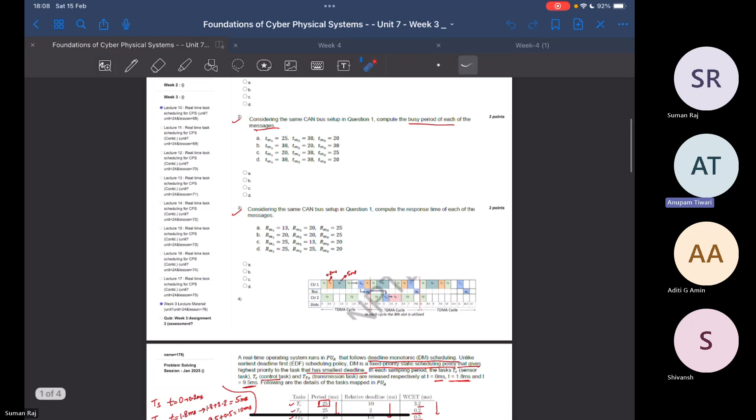Now, this semester, there is a problem in question number 8, and question number 7 is also having doubt. You can see ma'am, though you don't solve it, this present week is the last week.

So they say, number 8 is like find out the settling time in seconds, so you just have to put the number, but the unit is not required then? No, unit is not required, you just put the number, that's it.

Question number 7, again there is doubt. What is the doubt? Now if you see, frequency is under root of k by m, that is the formula. Which question are you talking about? Seventh question.

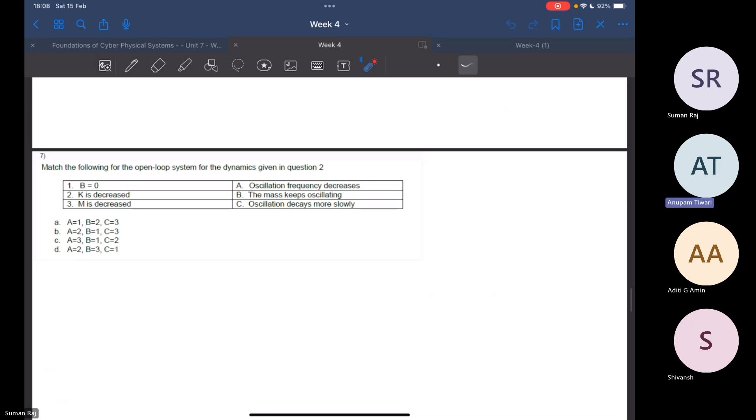Seventh is this one, right? Now, if you see the formula for the frequency, which is under root k by m.

K and m both are reciprocal. Now, if one thing decreases, the other will increase. Both of the answers are showing decrease.

K is okay, we'll come to these questions. We haven't yet started discussing, right? We'll come back to these. Decreasing is also having a problem in this.

So any question? Wait, how many are there? We are three people, so I think we can start.

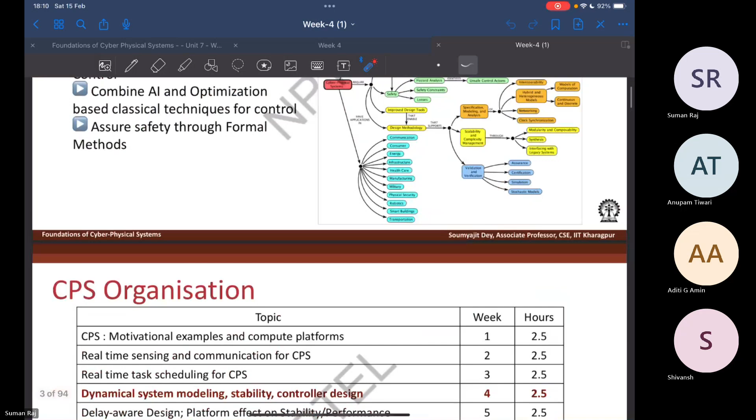So coming back to this, so in this week, where is that? Yeah, so there, it is written that dynamical system modeling, stability, and controller design.

So this is basically split into two parts in general. One is this continuous time modeling and control of dynamical system, and the other one is basically, I think, on the stability part. So before I move on to this, how many of you have already watched the lectures?

So that I know if I have to go deep into some of the things or just skim through. Can you raise your hands? I've watched the first 3 or 4 lectures, and then I started going through the slides before going to the lecture because I wanted to get an idea before I go to the lecture. So I've not watched all the lectures, but I did start watching them. 3 or 4 I've watched.

Okay, great. What about Anupam and Aditi? Have you watched the lectures? I have watched all the lectures. Okay, watched the slides. Okay, great. Aditi, anything from your end? Okay, so I think what we can do is since you have watched all the lectures and Shivansh has watched the initial few lectures.

The initial parts I'll skim through, but then in the later part I'll just highlight some of the details. Okay, so here, as is also pointed out in the lectures, we have this cyber physical system, and in this particular lecture, we were focusing on the controller and the control input computation, right?

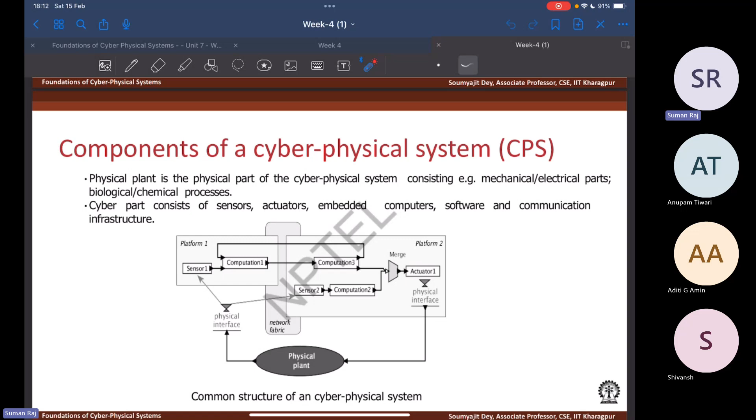So over here, like there are these different components altogether, but then let's say cruise control system, okay? So over here, they say that it controls the speed by measuring the vehicle speed and you compare it to a desired or a reference speed and automatically adjust the throttle.

So in general, whenever you want to go ahead with any control system or you want to do anything, you need to write their state space equations. Okay, so you need to identify the variables, and then somehow you need to identify the equations that are kind of governing that particular system.

Okay, so in this case, this is a very, very simple example. Here, if the mass of the car is m, and then u is the force that is generated at the road or the tire surface, and then this bv is actually the drag force.

Okay, so the equation goes like this. You have this m v dot, and v dot is actually your a, that is acceleration. So mass into acceleration is actually force, and then you have this drag force. So summing up both of these is actually equal to the force that is generated at the road interface.

Okay, and then we say that y is equal to v. So we are kind of having these equations properly. So here we say that v is equal to x dot, and what is x that they have chosen?

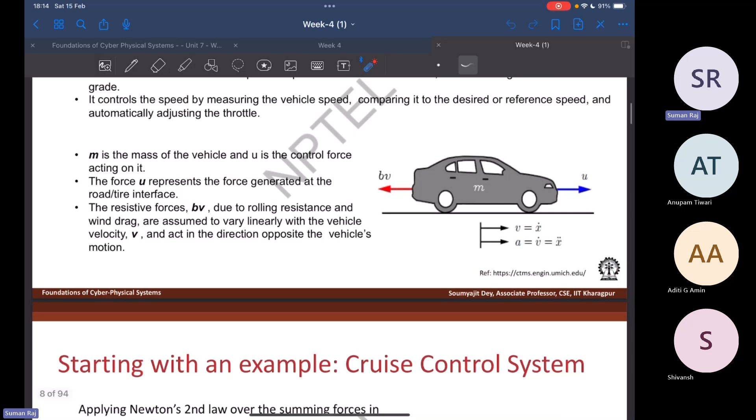Okay, x is in general displacement, and x dot is like velocity. And then you have acceleration, which is v dot, which is actually dv by dt, right? And this is actually dx by dt. So this is kind of shown in this way in the control systems part. So acceleration is your x double dot. This also you can write as d square x by dt square. Okay, so this is how things go on.

What is y there? Where? The last equation over here. Yeah, they are just saying probably that you're assigning v as some variable y. So over here, if you write, it will be like m y dot plus b y is equal to u. On u also, I think they might say like u can be x or something like that. Okay. Yeah.

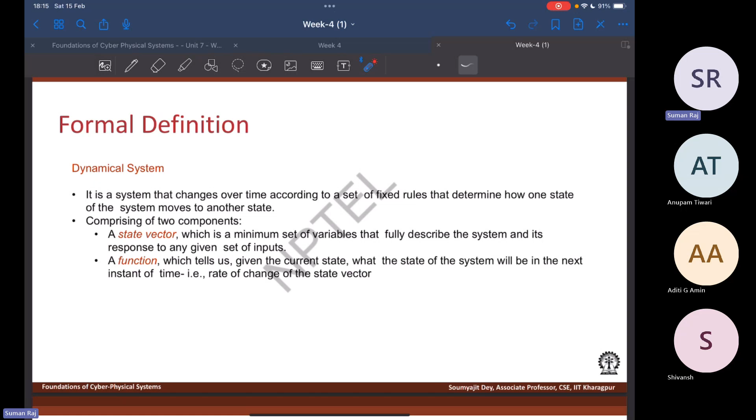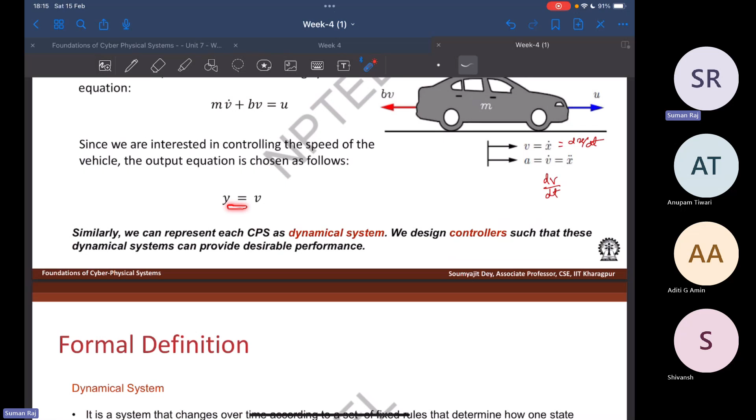All right. Now in this dynamical system, we have two specific things. One is this state vector and the other is a function. So state vector is like these variables that you need to describe your system. So over here, when we were talking about the state vector, you will have your v and a. These are different things, but then eventually you just have your x, and if you want to represent it in terms of y, that you will do. So we'll look through some examples later.

And then there is a function that is actually transforming your current state to some future state depending on some control parameters or the input that you get. So here, let's say this is a state vector x(t), and x is parameterized by t. For any state determined system, you know the state variables at an initial time. This is important. You know the system inputs for time t greater than 0. You know the initial state, and those two will be enough for you to predict the future state or output.

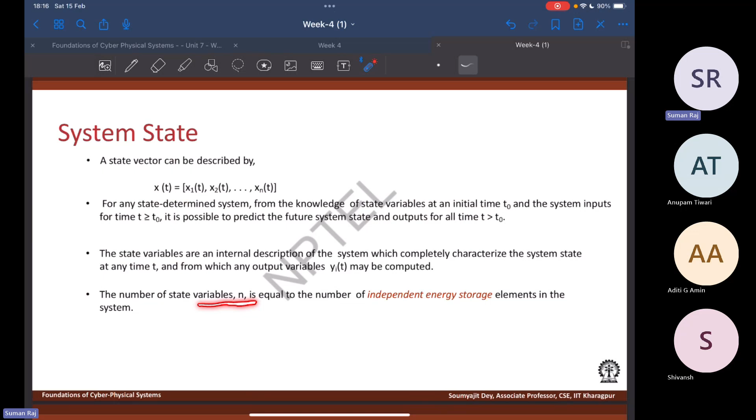Then we have the state variables. They characterize the system state at any time t, and the number of state variables n should be equal to the number of independent energy storage elements. So in general, the state variables that you pick out from your system should all be independent of each other, and in no form should something be the derivative of something else, like x2(t) being the derivative of this. That shouldn't happen.

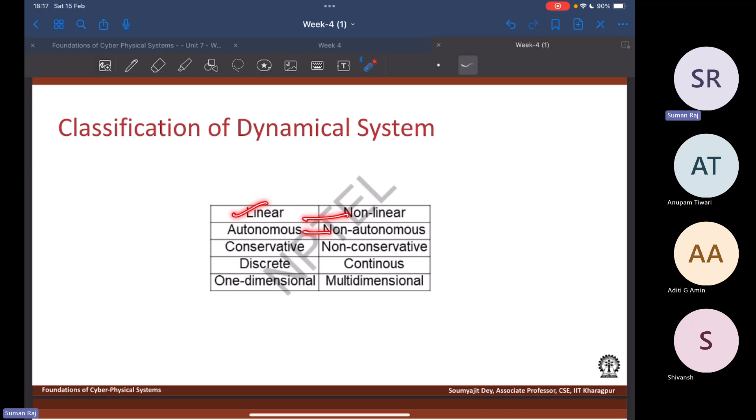Okay, so now let's say we have this kind of a function, and there can be multiple functions, and then you have these different state variables, and x1 dot is represented by a function of all of these entities. So there are different kinds of dynamical system: linear, non-linear, autonomous, non-autonomous, conservative, non-conservative, discrete, continuous, and 1D

or multidimensional. By linear system, we mean that the state equations should satisfy two basic properties: additivity and homogeneity. If your equations satisfy these two, it is a linear system. If not, it is a non-linear system. So f(x plus y) is equal to f(x) plus f(y), with f(x) equal to 3x as an example. That is a linear equation. But if you have a parabolic, that is not linear, or even something like xy is not linear.

The other classification is autonomous and non-autonomous. If there is a shift in your input and it reflects in your output also, your system is autonomous, otherwise it is not. So take this example, y(t) is equal to 10 x(t). Now a delay is introduced, x of t plus delta. So your y(t) is going to be 10 times x of t plus delta, right?

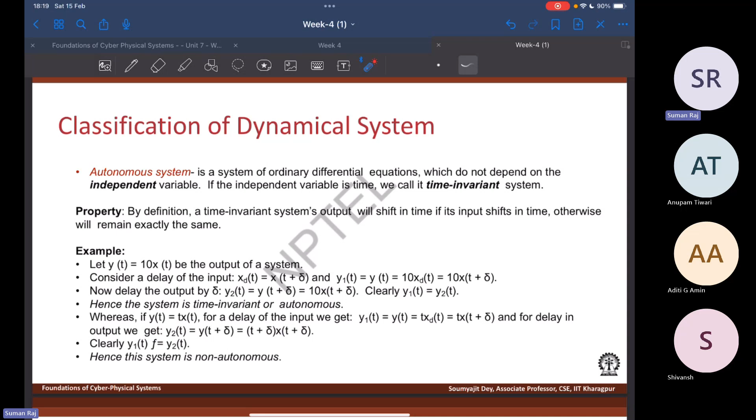Now see this other example. Where is it? Yeah, y(t) is equal to t times x(t). If you introduce the delta again, it will be t plus delta times x of t plus delta, right? So this is not reflecting the changes in the output in a similar way as x was changed. So this becomes non-autonomous and this becomes autonomous. And in the autonomous case, if your independent variable is time, it is called a time invariant system.

All right. The other one is very generic: conservative and non-conservative. In the conservative case, your energy remains constant. And here, there is some kind of dissipation happening. Now you have discrete and continuous, should be there somewhere.

Okay. We'll come to it whenever it is there.

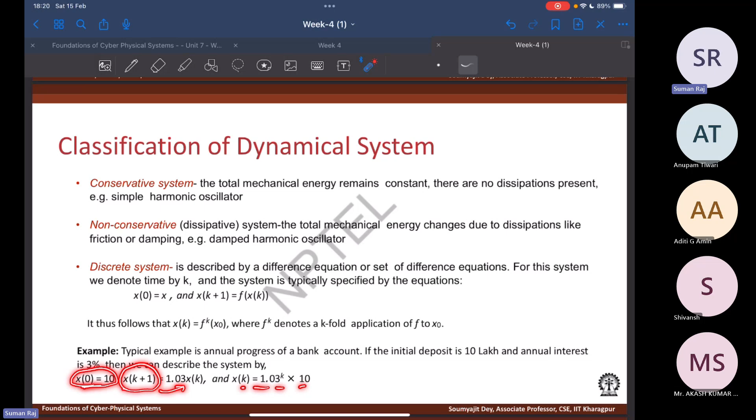So this is described by a difference equation or a set of difference equations. All right. So let's say over here we say that x of 0 is equal to x and x of k plus 1 is equal to a function of something. Okay, so over here this k represents the time. So at every time step, this is what is happening to the value of x. So you can consider those as the different time steps. So this is like the initial value, and then at the next time step, you get this value, and then after that, you get this kind of a generic thing.

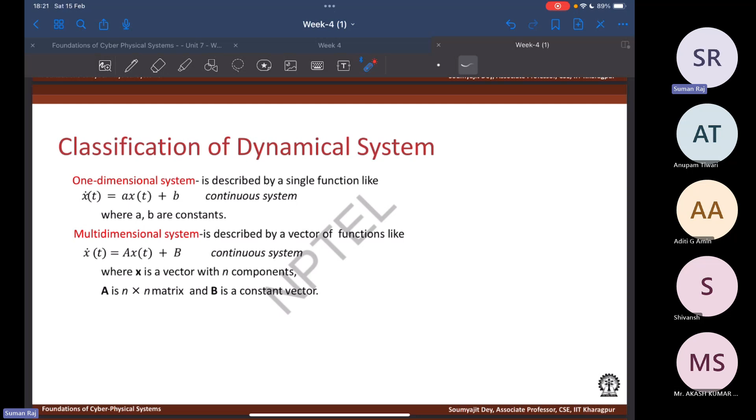Again, one dimensional and multidimensional. So over here, if you represent some kind of an equation where your a and b are just constants, it is called a 1D equation. And then if it is multidimensional, it means that your a is actually a matrix and your b is a vector.

Okay, so these are fine. I guess we can skip this. Yeah, feedback system will be there. Like if you have output of one going to the other and input of one going to the other, something like that, you have this feedback loop.

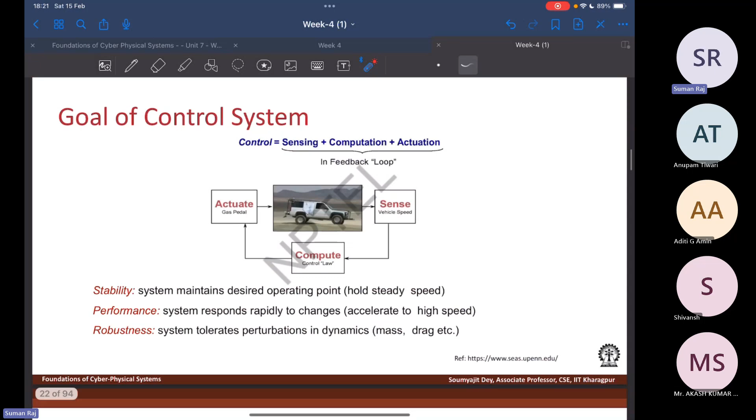And yeah, so this is one important thing. Whenever we want to do some kind of a control, we have sensing, computation, and actuation. So the major goals of these control systems are these three. The system should be stable and the system should have a good performance. By good performance, we mean that it should respond rapidly to any changes. And the system should be robust, which means that if there are any changes in your external environment or any kind of perturbation, then your system should be tolerant to those things.

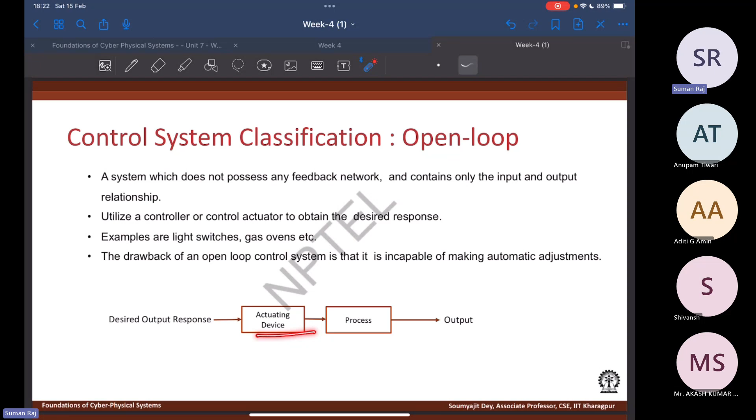Okay. Yeah, so then another kind of classification, this is where your feedback comes into the picture, and then we have our transfer function. So if there is some kind of response that is given and then something is actuating and then you have the process, this is an open loop. And if you have some kind of a feedback going back to your controller, that is called a feedback. And that is actually a closed loop cycle.

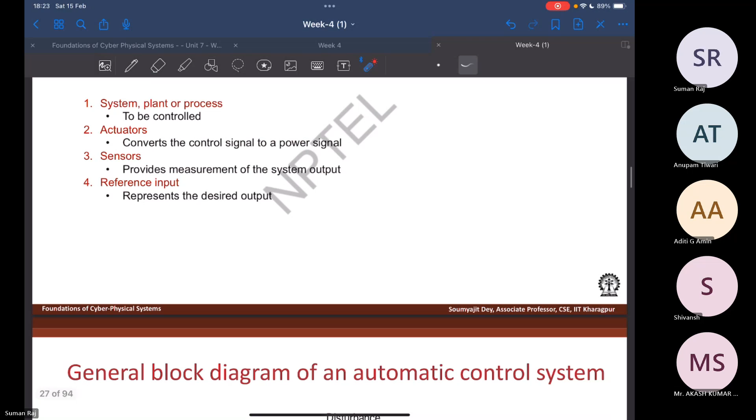Yeah, I think this is a good diagram. So for this closed loop, let's say you have set some set point or reference input, like you want to maintain 50 degrees Celsius somewhere. And then there is a controller which tries to maintain whatever air conditioner or heater is there at 50 degrees Celsius. And then you have the actuator that is actually doing the actual work. And then let's say some kind of noise is there. So this disturbance is actually acting as noise. Then you have your process.

So whatever is your actual output goes back as feedback, saying that, let's say, over here you said 50 but we are getting only 40 degrees. So for the error that is produced, which is just 10 degrees Celsius, the controller will make changes according to that. If initially this was 0 degrees Celsius, the error is going to be 50, so the controller has to make changes faster to reach the set point. So these things happen at the controller level, and this error plays a major role, and to get the error we need the feedback.

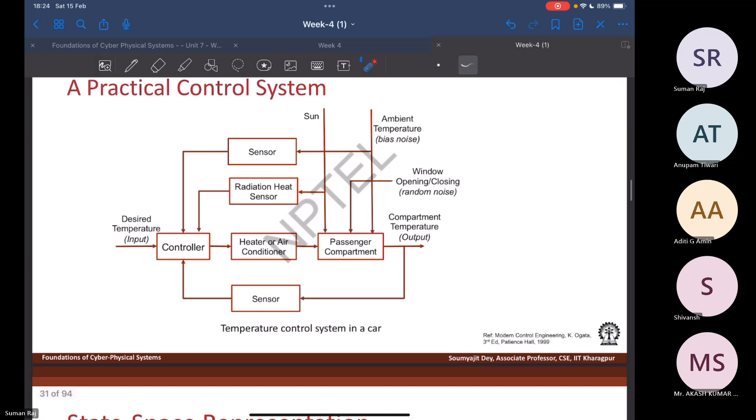Yeah, I'm actually trying to get some example of the state space. But yeah, okay, we can start.

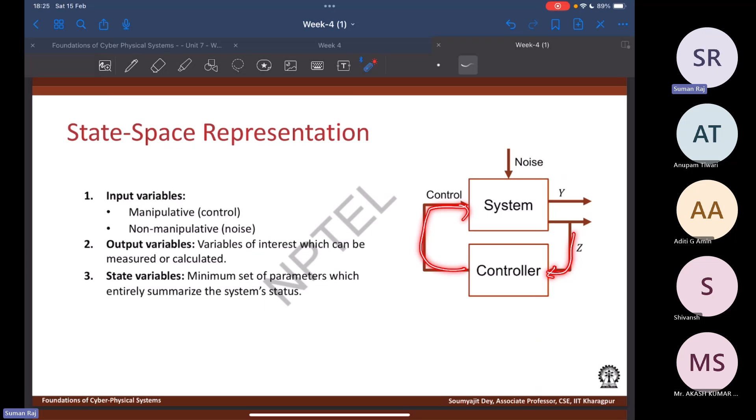So about the state space representation, you have this system, you have a controller, and whatever output you have from the system, that is actually your states. And some of the states you can send back to the controller, which goes back to the system. And then we have some kind of noise. So over here, the state is the smallest number of variables such that the knowledge of these variables, together with the knowledge of the input, completely determines the behavior of your system.

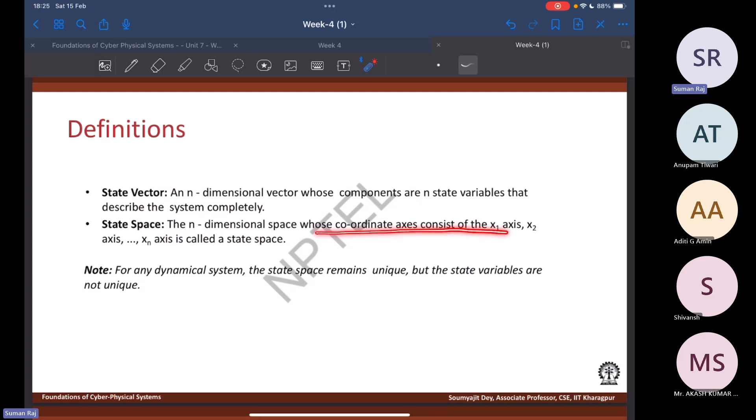Okay, so you can have it as a state vector. So state vector is actually this n-dimensional vector whose components are n state variables that describe the system completely. Those were that x, y, and so on, right? And then you have the state space. So this is actually the n-dimensional space whose coordinate axis consists of the x1 axis, x2 axis, and all of that. So I think these will be cleared when we go through some examples. Let's see. Yeah, let's look at this for now.

So there are these two different kinds of state space models. One is continuous time, one is discrete time, right? So let's say over here we have this continuous time. So this we have also seen earlier. So we just represent it like this. Okay. So your A of T is actually your matrix, right? This was your matrix because this is multidimensional over here. And your B is actually a vector. Either it can be a vector or a matrix, depends on how is your U(t). But U(t) in general is like a single dimensional. I mean, it's a vector, so you need to have a vector over here. Okay, so these two are actually your independent variables.

And if you have some kind of a discrete time state space, you have similar kind of equations. But then if you see, this T has actually changed to K. And this is what we also saw earlier.

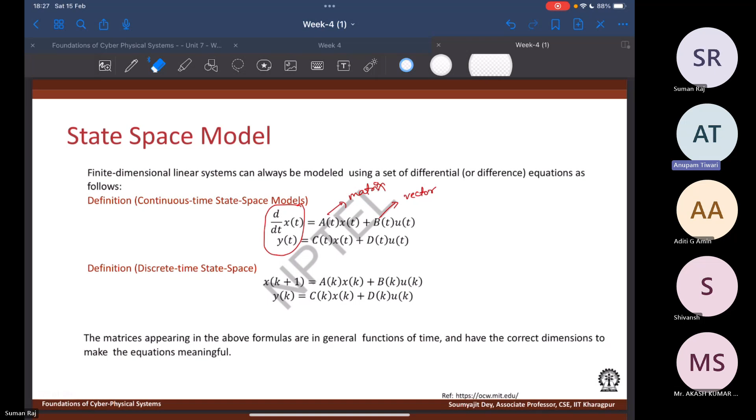Yes, Anupam, you have a question? Ma'am, can you give us an example wherein a second order equation we can represent in this form? Yes, actually, there is an example. I'm just trying to search for that. Also, what would be an example for a discrete time state space system? Because I don't get a practical example, because time will always be continuous. Yeah, correct. But actually, many questions are also based on that, on the discrete time.

Ma'am, can I say? Yes, time is always continuous, but if you use continuous equations, a lot of memory is consumed. So we make a controller in discrete time, with a sampling time, so that the memory and processing is fast. So that is the reason all continuous systems are converted into discrete systems.

Yeah, but he is asking for an example. Like, where do we practically use it? Any example, like temperature going from 50 to 60. It will become 50, 51, 52, 53 like that. So we can have a step of five, or a step of two, I think. It's more about the representation, Shivansh. Yeah, I don't get it. Yeah.

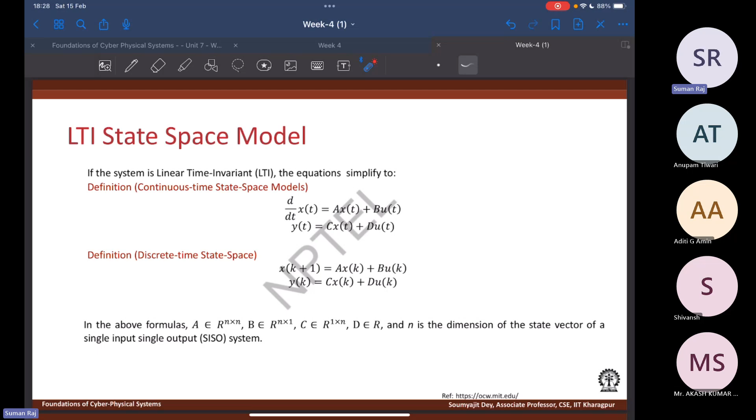Yes, let me see if there is an example, but for timing, I'll continue this. And very likely the examples are right there. I think a spring damper system is there, maybe, but we'll check. We had questions in the assignment as well for the spring damper system, like 3 or 4 of them. Yeah, I think the first 5 questions are based on that. Yeah, so we'll get to that anyways. Okay.

So about this time response analysis, let's see. Again, over here also we have some questions in the assignment. So this actually means that you want to analyze the behavior of your system with respect to time. So you have inputs that are functions of time, you have outputs that are also functions of time, and then you want to see the behavior of your system. So there are these two different kinds of responses. One is transient and the other is steady state.

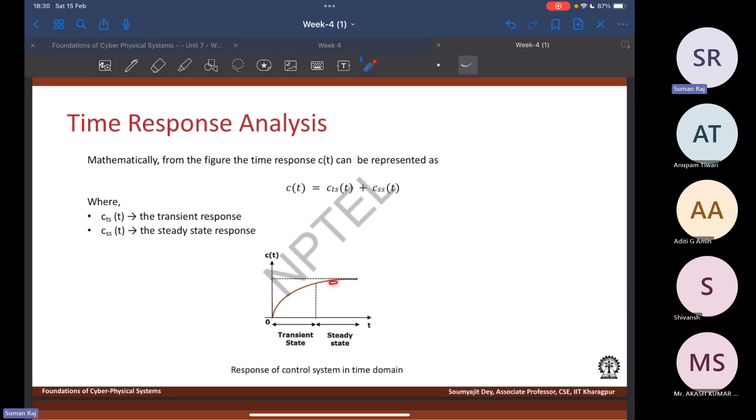So your final part just remains as 1. So your transient term is this, that becomes 0 as t approaches infinity. So your steady state value is going to be 1. All right. So those are the things.

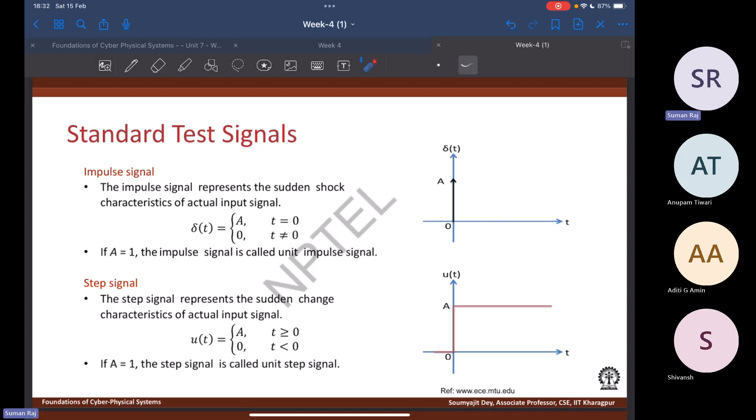And then I guess these are like standard test signals. And I think after this, they talk about the Laplace transforms. So there are a few of these signals that are important and you should just know them in general. And whenever you practice more, you would just kind of remember the equations also. Okay, so this is very simple. It's an impulse signal. Then we have this step that whenever t is greater than or equal to 0, it becomes some specific value. And if it is less than 0, it is 0.

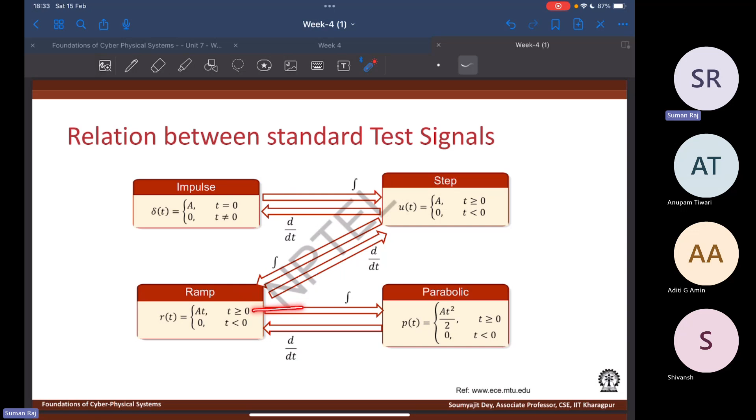Okay, and then we have the ramp signal. Then we have the parabolic. And there are certain relations between these standard test signals, which means that if you integrate impulse, it becomes step. If you differentiate that, it becomes impulse. That is straightforward. But if you integrate step, it becomes ramp, and the ramp, when you integrate, it becomes parabolic. Okay, so these are the things.

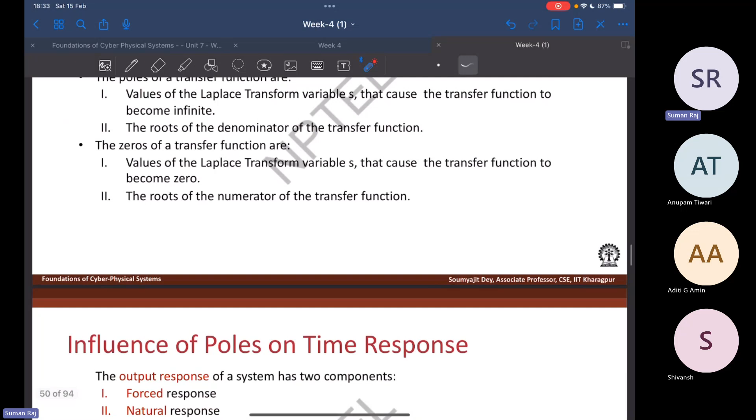No, I guess none from my side. Okay. Yeah. So what I'll do is I'll cover transfer function, then I'll skip the rest of the parts because I want to go back to the questions and assignment questions, and then take one theory at a time depending on what is required. Okay? Yep. Okay.

Before that, you need to check that it is a time invariant system. Okay. And then you calculate this transfer function as the ratio of Laplace transform of the output to the Laplace transform of the input. So over here you will say Laplace of C(s) over Laplace of R(s). This is actually going to be your transfer function. I don't know how that is represented.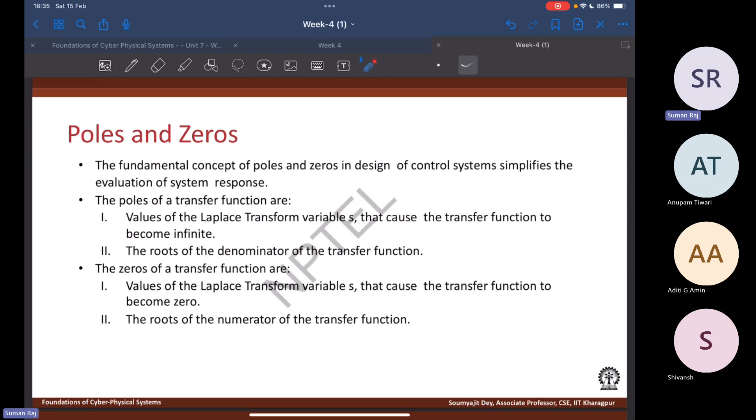Okay. And then we have these notions of poles and zeros because depending on this, your system stability is defined. So the poles of a transfer function are the values of the Laplace transform variable s that cause the transfer function to become infinite. And these are actually the roots of the denominator of your transfer function. So whenever you are asked to calculate the poles, they would actually ask you to calculate the poles of a system, not a transfer function in general. So you have to calculate the transfer function first, check the denominator, and then get the roots of the denominator.

And then about the zeros, these are the values of the variable which cause your transfer function to become 0. So obviously you have to make the numerator 0. So these are the two things. If you want to calculate the zeros, you have to make the numerator 0 because your transfer function should become 0 for those values of s.

And if you want to calculate the poles, you have to make the denominator 0 and calculate the roots, because those are the values of s for which your denominator becomes 0 and your transfer function becomes infinite. So is this part clear? Yes. Okay.

Okay, so this is fine. Yeah.

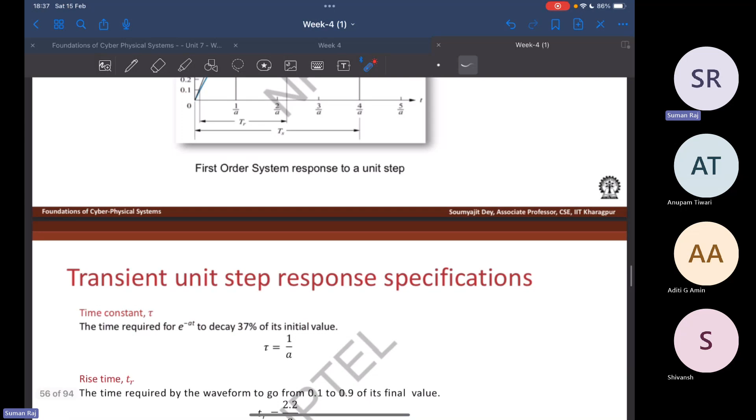Okay, so I guess with these equations, let's start with some of the examples. Oh, I'm sorry, I didn't say what a is over here. So this is actually your initial slope, which is 1 by time constant, and that's how you get this 1 by a over here. Okay, so let's see.

So the first question is about a buck converter, which is a step-down DC to DC converter that consists mainly of an inductor and two switches. In general, they are explaining how this DC to DC converter works. It switches the connection of the inductor to the source voltage to accumulate energy in the inductor. So there should actually be a switch over here. And whenever you want to charge your inductor, it connects to the voltage, like a power source.

And whenever it wants to discharge the inductor's energy, the switch opens up. So you are no longer connected to the power source. That is the basic idea over here. So it says that clearly the control input to the system is your source voltage, which is your V in. And the system's output is the voltage across the load. So this is your Vc and this is your V in.

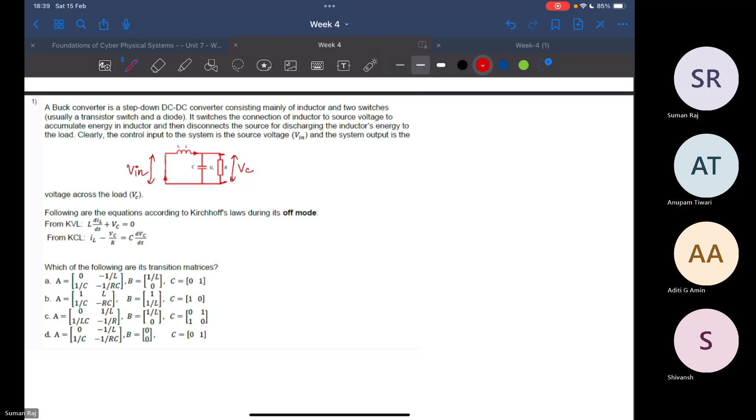All right. So they have also given these equations according to Kirchhoff's law during its off mode. The only change during the on mode would be that this won't be zero. During the on mode, the equation from KVL will actually be L di by dt plus Vc is equal to U. That will be some kind of a value. And so now the question says that you calculate the transition matrices for the off mode.

Before that, I'll actually share a paper that has done this full derivation. I won't be doing the full derivation right now, but this paper will help you. Let me see. So I've shared a paper in the chat window. Are you able to access that? Yes. Okay.

So it actually starts at section 2.a. Over there is this buck converter state space model. And they have spoken about both cases. If you look at equations 3 and 4, they are for the on case, and the other one is for the off case. So that is the thing over here.

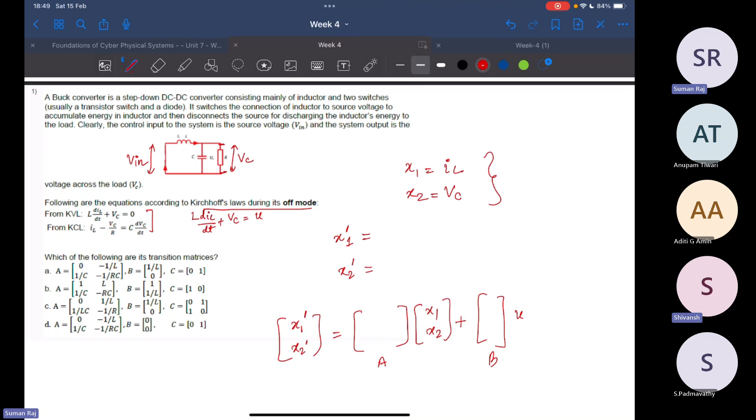What is the role that C is playing here? I get the role of A and B, but what is C here? C is from the KCL equation, which was given initially in the question itself. I don't think so — that's what I was thinking C is as well, like the capacitance. So what is C in the final answer, the options? It may be like this, just a constant.

So this C is different from that C. Yeah, so I think it should be this, plus C. But I guess we should be able to conclude the answer only from A itself because the options are all different. One of them is — okay, yeah, you can check. I'll check. Okay, yeah.

Okay, so let's move on to question 2. This is where this spring mass system with damper is there. So let's see.

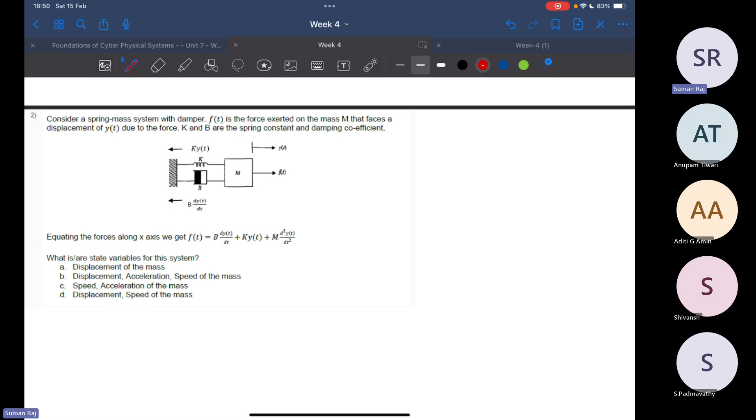Again, the very first thing for every equation is to check what are the exact variables. This question is asking you what are the state variables for your system, so you need to identify properly which ones are dependent and which ones are independent. Over here, the question is about this spring mass system with a damper.

So this is your damper, and F(t) is the force exerted on the mass m, which faces a displacement y(t) due to the force. So this is the force being applied, and this is the displacement because of the force F. Now K and B are the spring constant and the damping coefficient, and the equation is also given.

So you have to identify what are the state variables for this system. Let's say you identify that y(t) is equal to x1. Then what are the rest? So you have dy/dt equal to x1 dot, right? And you can say that b times dy/dt is x1 dot, plus k of x1, plus m.

You still have to actually check, because that's actually your x double dot. But this and this have the same unit, so you can think carefully and then choose your answers.

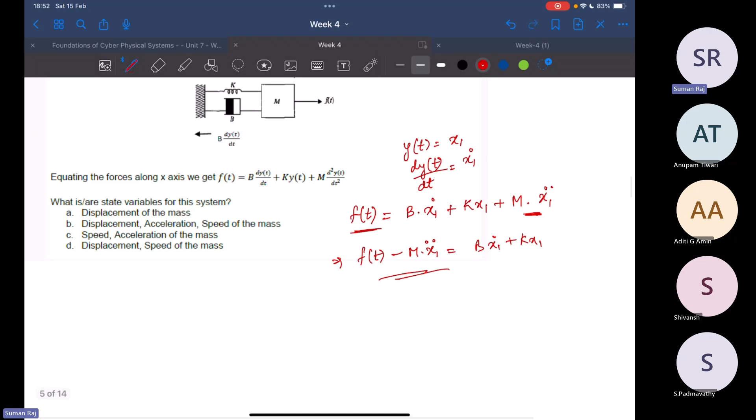I mean, we have to calculate for F(t) only, so putting mx like that — but actually in the next questions also, when we try to solve these, it becomes like that. That's how these equations go, because eventually you have to simplify. Over here also, in the paper, they have simplified it a lot to get it to x1, x2.

They substitute so much, and then they want to get something totally independent. So if you look at any of these A matrices, they don't have anything like your VC or IL — it should be independent of your x1 and x2. That's how it becomes. So you need to check this properly and frame the equation for this equation of motion.

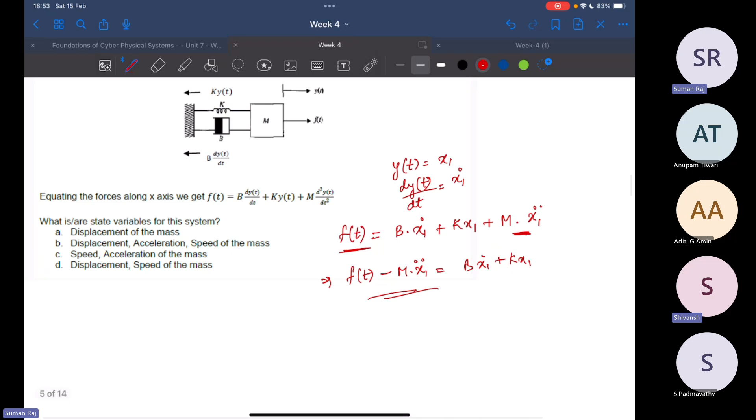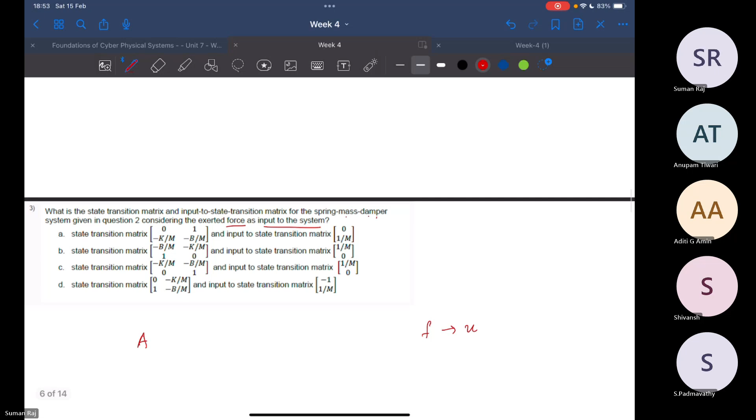Okay, let's see what is the third question. This says, what is the state transition matrix? Again, we have to calculate this A, and the input to state transition matrix for the spring mass damper, again from the above, considering the exerted force as input to the system. So your force is your input. They have already told you that this is your U.

So more reason to shift it to the other side and keep this alone. Maybe your equation should become: what is this, d2 y(t) by dt square? You should simplify it like this: 1 by m of minus b times x1 dot minus k of x1 plus f(t), which is basically your u, that is your input to the system.

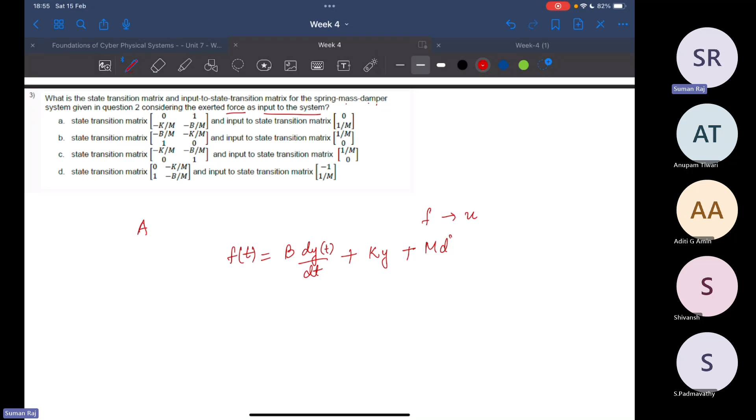So now in this question, let's see what happens. Your equation earlier was f(t) is equal to b of dy by dt — I'm not putting it like this, but you can put that when solving it — this is k of y plus m of the double derivative of y. So let's say if you have x1 equal to y(t) and x2 equal to dy of dt, so your x2 is equal to x1 dot, right?

And then over here, what do you say? You have this u, or you can just put f for now. f minus b of x2 minus k of x1, divided by m, that is equal to your x2 dot, right? So again, that way you need to identify x1 dot and x2 dot, and you get this — this is going to be your A.

You have your x1 and x2 over here, so you simplify this and put this A properly. And then you will have this as B, and over here you will have your f. So one correct way is to do it like x1 dot, x2 dot. The other way is to do it like x2 dot and x1 dot. So you can get a different answer for this particular thing, right?

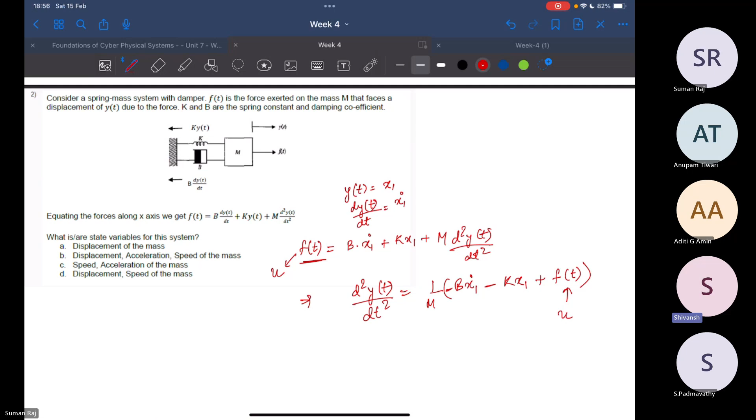So there can be two answers over here — one will be in this format, and one will be in this format. I have a little doubt with the previous one actually. Yes, when we say, for example, in the second option, displacement, acceleration, and speed of the mass — aren't speed and acceleration just derivatives of displacement? So why are we choosing them as state variables? You said they shouldn't depend on each other, right?

Yes, they actually shouldn't depend on each other, that is true. But for all of the options, something is depending on the other thing. So over here, the way we are putting this is more like choosing the variables, because the equation is slightly dependent in the physical world. You are right. Because the equation that you came down to, it had all three — displacement, speed, and acceleration. But is it actually depending on all three?

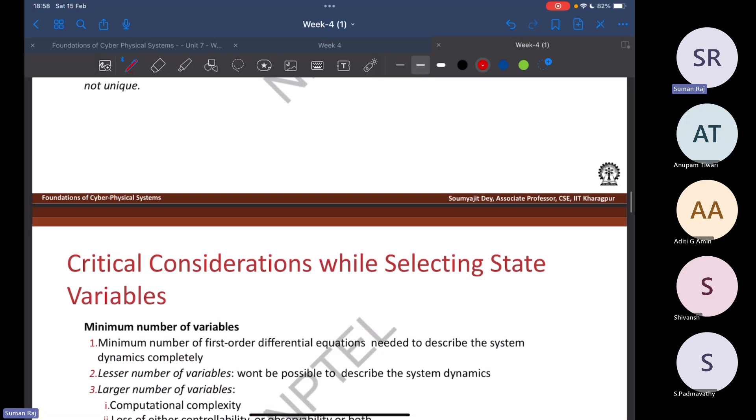I think over here, what we can say is as the state variables, you have your x1 and x2 — that is definitely there. But the displacement part, over here they had put that they need to be independent of each other. Yeah, this is actually the tricky part of these state spaces, because it becomes about the way you actually model your system, right? The way your equations also become. That's why I told you that you may have multiple answers.

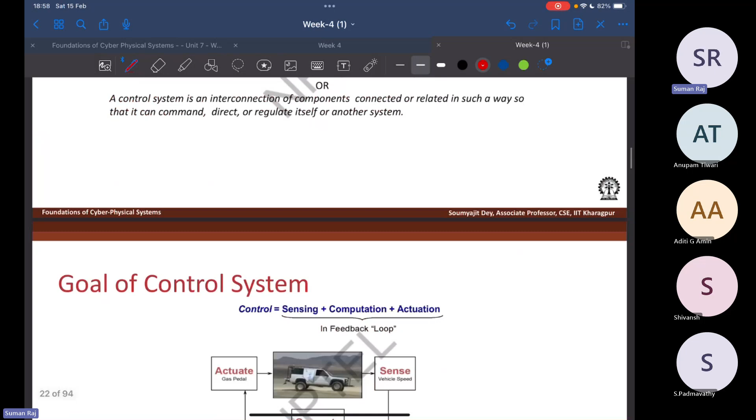Where was this? Let me just check if they have something specific written. Is it later somewhere? I'll have to check. Wait, no, no, it's over here. They say that the number of state variables n is equal to the number of independent energy storage elements in the system. So in this, there are two energy storage elements.

One is the damper, one is the spring, and mass is also an energy element. Oh, right, right, okay, you're right. Energy can be stored only in the spring, that's it, right, right. Yeah, so this is the spring and this is your damper. So your variables are supposed to be equal to 2.

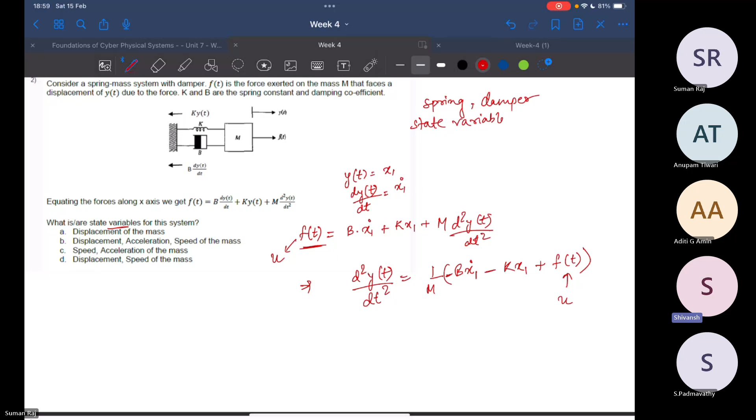So should I move ahead? How do we get to those two? How did you choose which two?

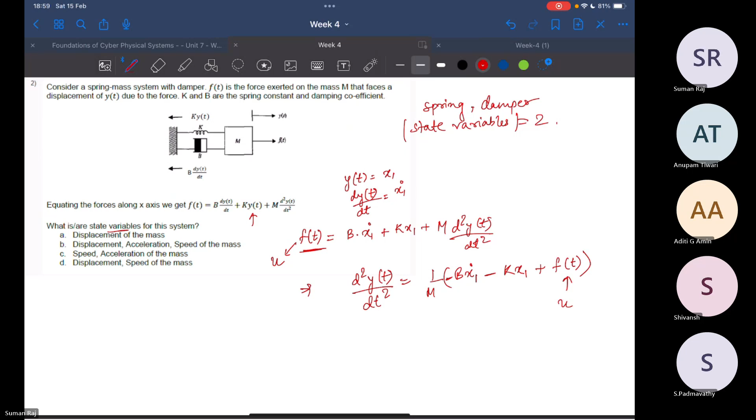So you actually start with one first, and then you move on to the next. Usually we start with whatever variable is given, you say that is x1, and for this example it will be the displacement. One is displacement, and then we move on till which point of time? We can differentiate. For the force, we'll need the acceleration as well, but that depends on the speed, velocity.

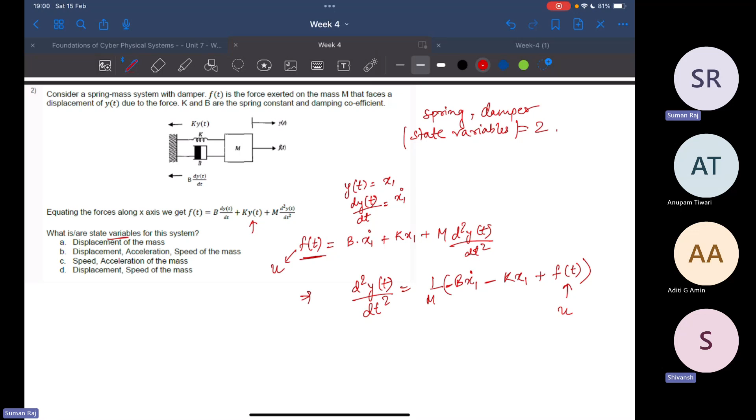So we just take the first two because we need to, or is there another approach? I'm just thinking, because your acceleration is actually the output, right? I'm just thinking if that is still one of your variables. Okay, actually fair enough, that makes sense.

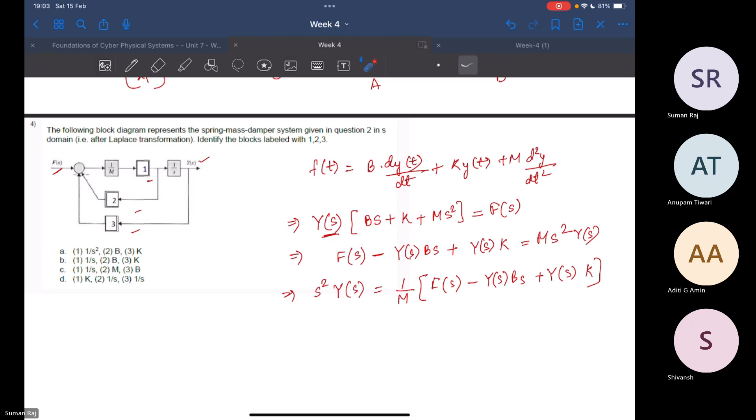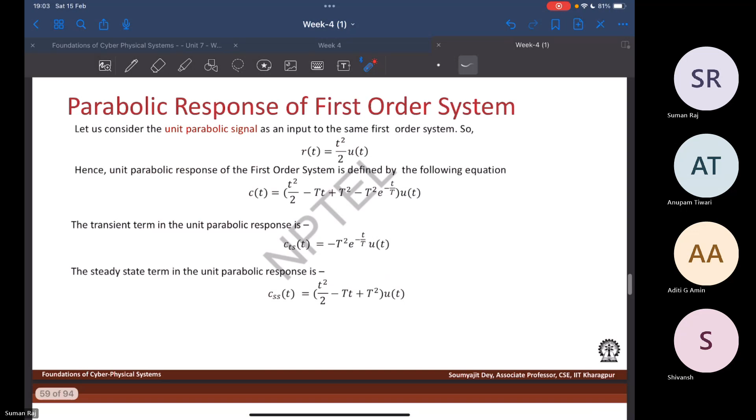So now what do we have to do? Did we go through the Laplace transformation section yet? I think we stopped here, right, at poles and zeros. Okay, it's not provided, I guess. Yeah, it wasn't in this PPT.

So we basically have to identify, this is your one part that is going to your error calculation, and this is the other one. So this is your fs and 1 by m, right? So this is actually your fs into 1 by m that's going inside this block. So what are the other two? The other two are definitely these.

But the thing is they are going in from different points, and both of them are not ys. So even if you calculate one of them as this ys, okay, there is one s over here, right? Sorry, I just didn't see that. Okay, so I think this one should work now.

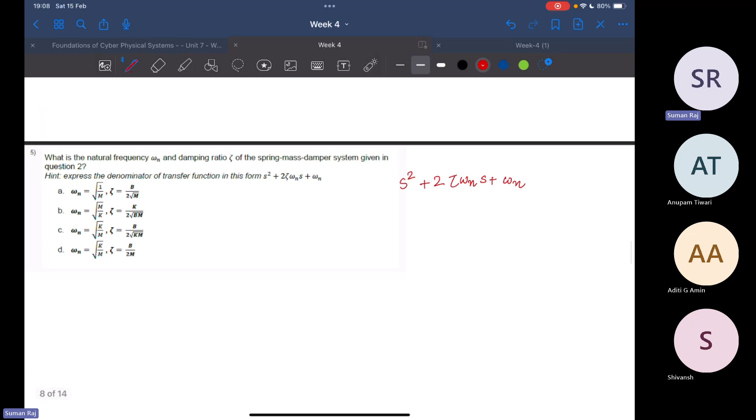I'll still write it over there. So ys is equal to, sorry, ys is multiplied with ms square plus bs plus k, is equal to fs. This is what we got from the last question. So now what is your transfer function? That is ys by fs, because that's the ratio of output by ratio of input, both in the Laplace domain. So this is actually 1 by ms square plus bs plus k.

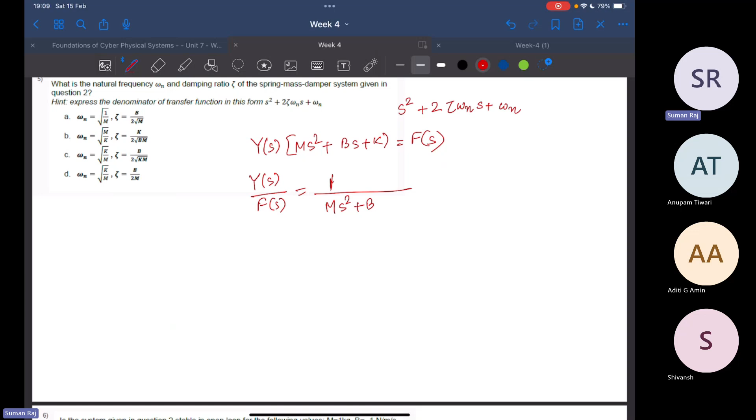Okay, so now you have to express this part in this form. Okay, so this is what we have to do.

So now let's say we have this ms square plus bs plus k. Let's do it over there itself. Okay. So first of all, you have to get s square. All right. So let's make this 1 by m. This becomes s square plus b by m s plus k by m.

Right. And then what can we do? We have to get something over here. We are eventually going to this format of getting this omega n, and we are trying to separate out this part and this part. So you already have this s over here. So we are trying to get this wn such that you extract some wn from here, and then whatever is left behind, that is your zeta.

Okay, so this is your s square plus b by m of s plus k by m, the root of whole square, right? What does this become? It becomes 1 by k. So you took out this part, and your denominator became 2 times b by 2 root km, into root k by m into s plus root k by m the whole square, right?

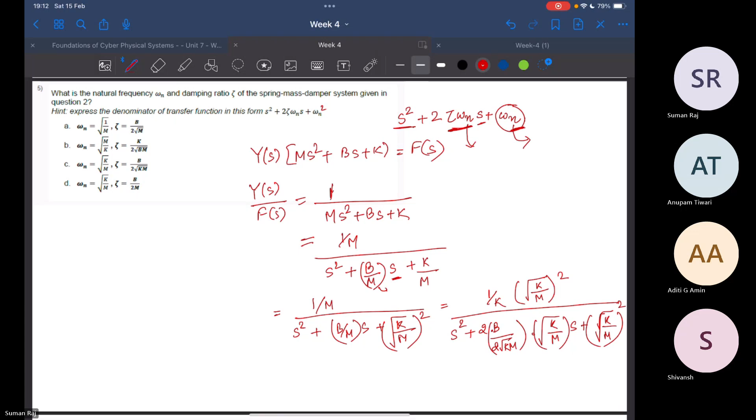This actually should be wn square, right? If I'm not wrong. I think there is some typo in the question, because how else are you supposed to take out that part over here? Okay, so I think if you do that, this should work. Is this okay? Yes. All right. So I'll move, but please feel free to stop me whenever required.

So the next question, question 6, says: is the system stable in open loop for the following values? So what you have to do is you actually need to check the poles and zeros. Let's go back and check over here. So we actually need to check this part. Yeah, this is the exact slide that I was looking for.

So when you calculate your poles of the system, and how do you calculate the poles? You want your system to go to infinity, which means your denominator has to be equal to 0, right? So you first calculate the poles of the system, and then you do an analysis on top of that. So if your poles lie on this imaginary axis, it means that your system is marginally stable, which means that your values are fluctuating between two values.

And then if it is stable, your poles are actually having negative real parts. So if that is negative, they will die down after some time and they will become stable. But if they have a positive real part, it is going to grow on, and then it will become unstable at a point.

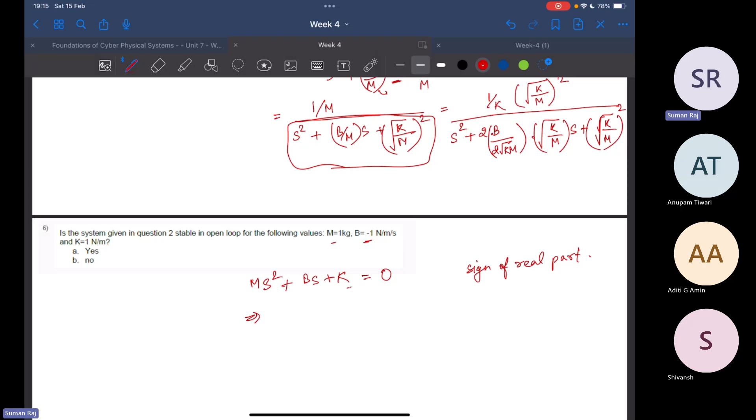Okay, substitute these values which are over here. Solve it and then analyze what values you are getting. And you have to check the sign of the real part, because the stability depends on this, right? This is what it is. Maybe I'll take a screenshot and then paste it there for you all. Okay, so you can do your analysis on top of this.

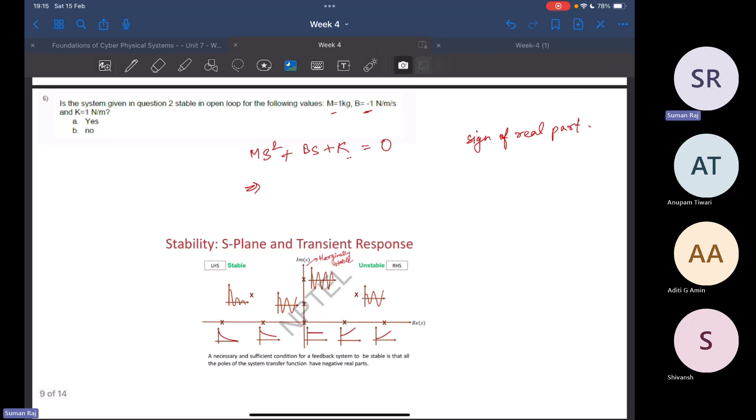All right, let's go to the next question. This says match the following for the open loop system for the dynamics, again given in question 2.

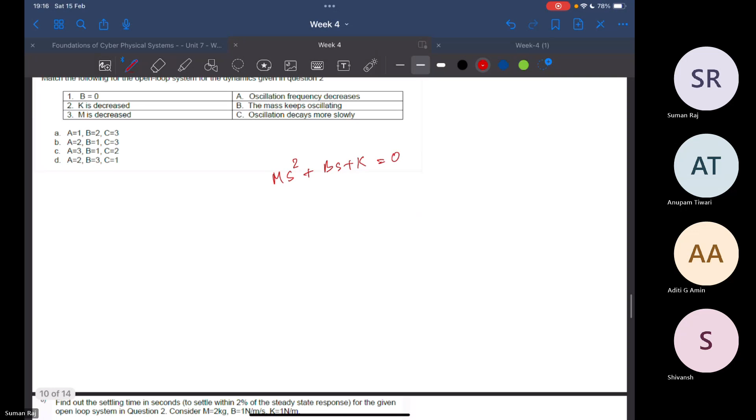So yeah, I guess you can still do the analysis based on this value itself. So if your b is 0, then what is going to happen? If you have ms² + bs + k = 0, in case your b becomes 0, what happens? Your s² is equal to minus k by m. So eventually your s is imaginary, right? Then you can check that if it is imaginary, it doesn't have a real part.

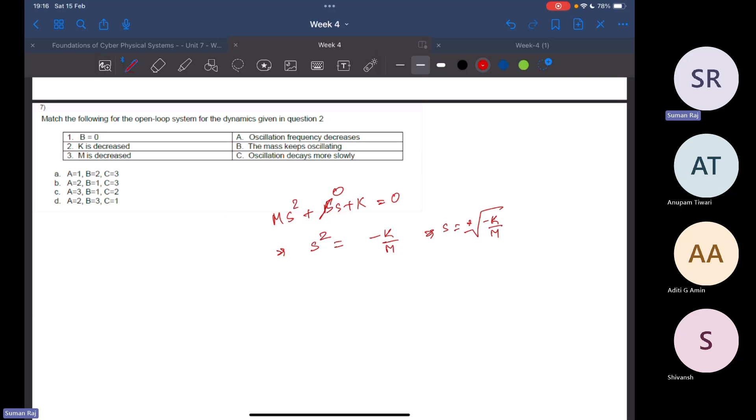Then what is the case if you have your poles on this? Yeah, it keeps oscillating. Like I said, you have to make a choice. I won't tell you the answer. Oh yeah, okay.

And then you can just analyze, given this equation again, if you decrease k, what is going to happen? So basically, get the equation of s in plus minus, this format. And then you try and analyze for all these cases what is going to happen. Okay. All right.

Ma'am, I have one question. K and M in the equation are reciprocal. So if K is decreasing, then oscillation is increasing. And suppose if M is also decreasing, then oscillation is increasing. So in the answer on the right side, one has to be increasing. Is this an error? Okay, now I understand what you were saying. Yeah, that's a fair question.

So what you can do for now, let's see what equation we get. We usually get minus b plus minus root of b² minus 4mk, by 2m. For the one case, it's fine. Let's say you want to increase k. I think based on these options given, I would suggest you consider this part, otherwise you won't have options matching. But whatever answer you put, NPTEL should send a clarification later about the correct form of this question, because it doesn't make sense to put both. But still, I don't want to give you something false.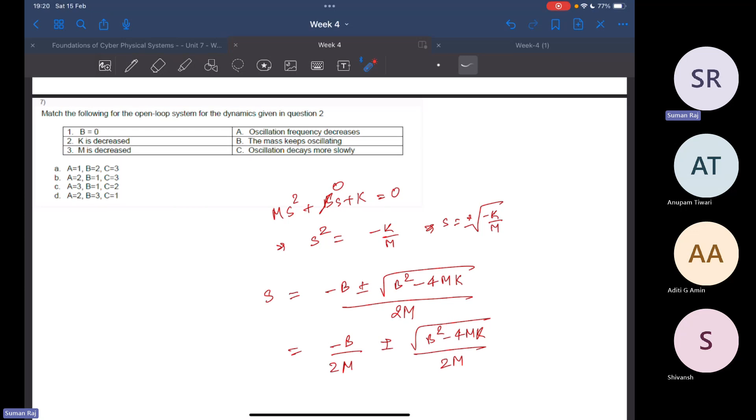The first question is correct: B is equal to 0. Then it's the same equation you told initially, S is plus minus root K by M. If B is 0, then K and M are reciprocal, and if one is decreasing, S is basically the frequency, so one will increase then. No. So the thing is, when your b is equal to 0, that is one part.

So consider the equation in three different formats. In the first one, only keep b equal to 0, analyze this and choose an option. In the second one, pick this equation, decrease the value of k, and analyze what happens. In the third case, pick the same equation, change the value of m, and see what happens. So b is 0, k is decreased, m is decreased. These are three independent questions.

I have to take B equal to 0 for all the cases? No, no. B equal to 0 is only for one question. Okay. Should I move to the next question now? Yes. All right.

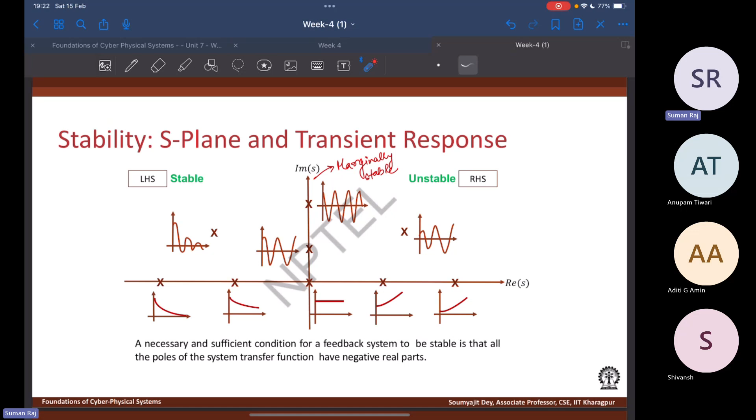So the next question says find the settling time in seconds to settle within 2% of the steady response. Again, there was some timing analysis we checked. Where is that slide? This one. So we need to find the settling time for the given open loop system in question 2. You need to calculate this 4 by A. And what is your A actually? We need to calculate that. Let's see how that is done.

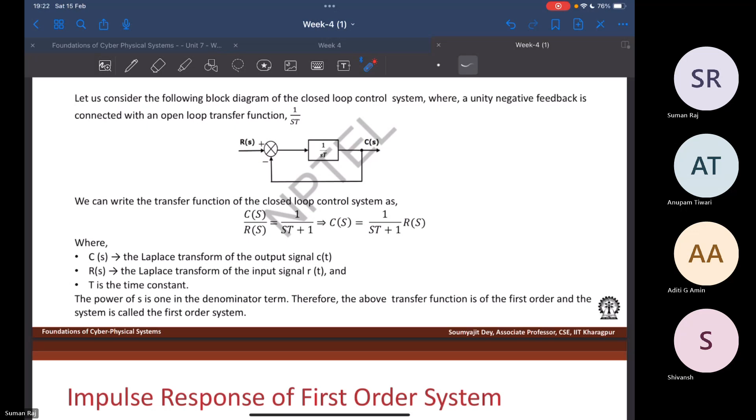Yeah, your A is actually this part, right? One second. This equation, I mean, over here, the denominator that we had, this is what is your A, if I'm not wrong, right? So you can then calculate 4 by A for this question.

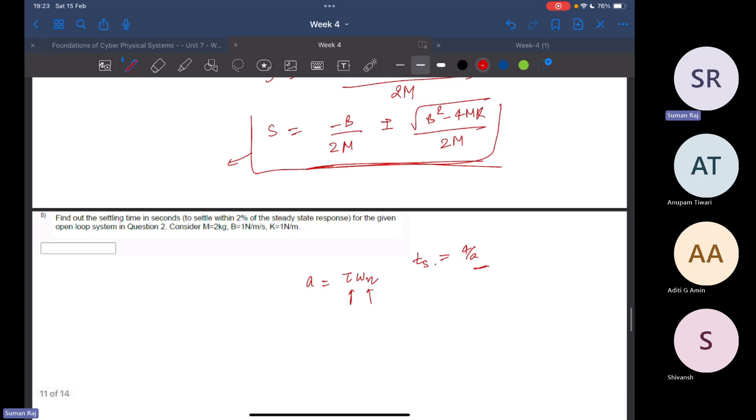I think this should be fine because you would have already calculated this omega in that question and even the tau, and then you can calculate this. This should be okay. But make sure that these values that they have given are the same for the two questions, okay? Here m is 2, b is 1, and k is 1.

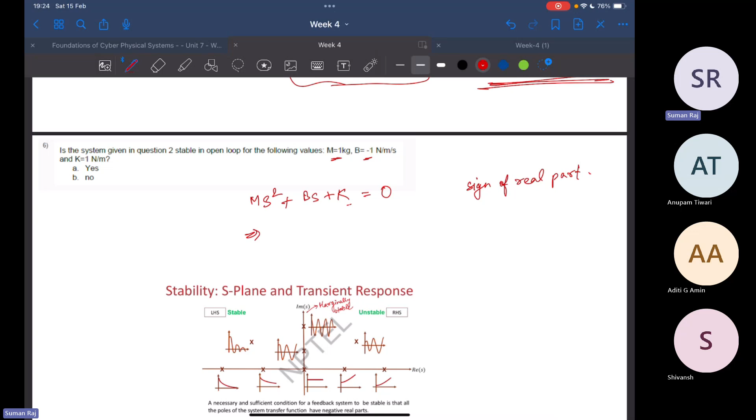Mm-mm. Yeah, so you can substitute the values over here and then you can calculate, because see, for every question these values are changing, so just be careful when you substitute these values and then you get the answer. Okay. Yeah.

All right, so the second last question is about this h(A). For the open loop spring mass damper, again the same question. When we are using this Ackermann's method to place the system's pole at this, use the state transition matrix corresponding to the... Okay, again a very different value of m, b, and k. So we have to refer to Ackermann's method. This was towards the end.

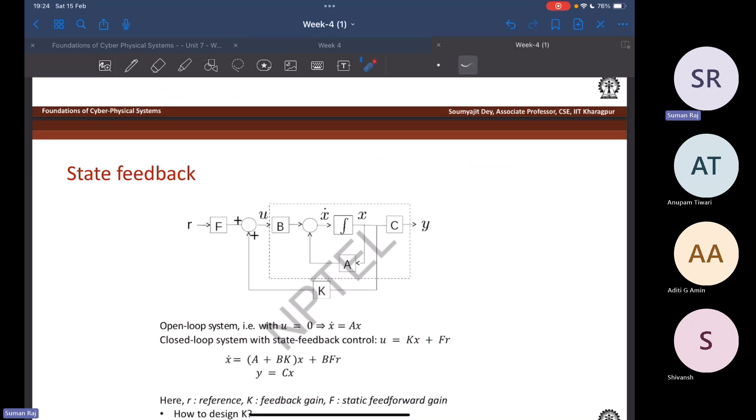Okay, so with these methods, basically we have to design your feedback gains based on how you want your output to be. Okay, so we kind of know where the poles are going to be, and then we design our gains based on that. So you can go through these slides just to understand what is happening. So there are two methods to it. One is direct substitution, the other one is Ackermann's formula.

So in the case of Ackermann's formula, what happens is you have to check the controllability of the system, and then you have to choose the desired closed loop poles. The closed loop poles are already given to you as minus 0.8 and minus 0.8. Okay, and then based on this Ackermann's formula we have to calculate this. So since you are given only two of the poles, right? So we will just have two of these.

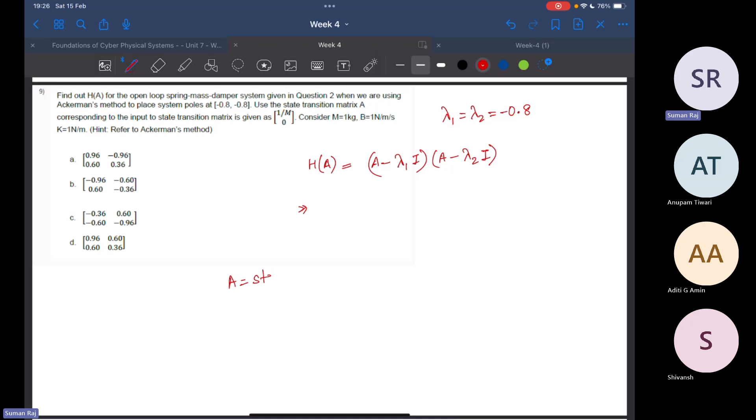So basically we are going to have h of A is equal to (A minus lambda 1 I)(A minus lambda 2 I). Okay, and what is your lambda? Both are equal to minus 0.8. All right, so based on that A... Ma'am, sorry, can you help for A, ma'am? A is your state transition matrix that we already calculated. Here it's written, no? Input to state transition matrix for the same question, question number 2.

So we would be having from here, right? You would be getting your A from here, correct? And that is what we are going to substitute over there.

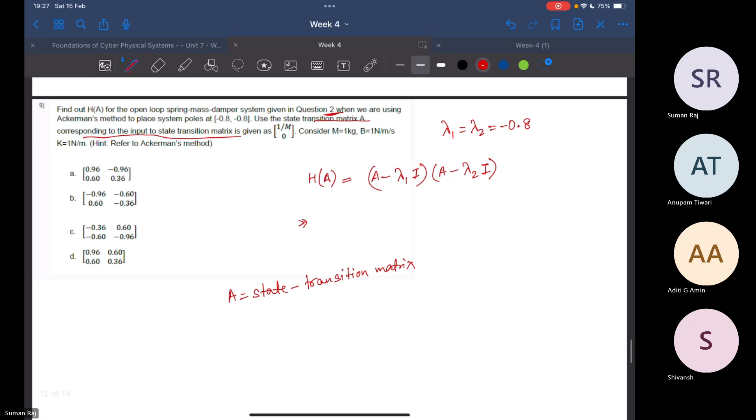Okay, so this is your A, and then you have your input to state transition matrix. That is given as 1 by m and 0. That's already given over here. Okay, so using that, you can get the answer from there. You just have to solve the equation.

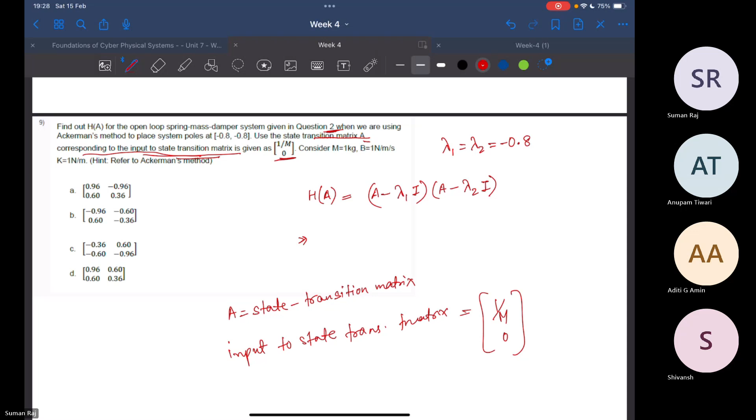So will you be able to do this? Yes, no, doubtful. I guess doubtful, but yeah, okay, I'll try. Okay. All right.

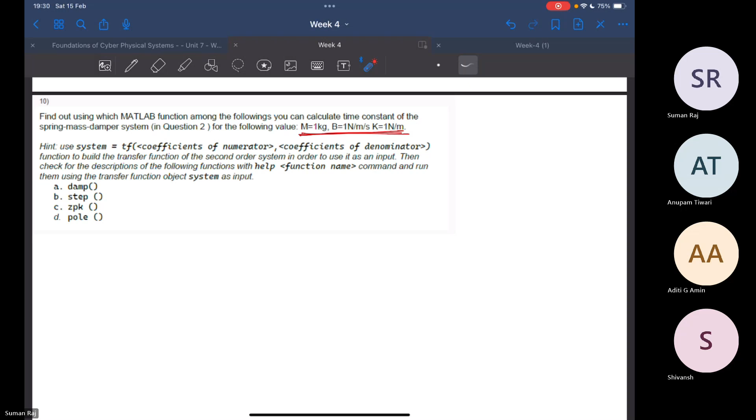Okay, so any questions? If you have gone through other details in the slide, that's good. But yeah, we have covered almost everything that's required for the assignment. Any doubts or any questions that you would want me to discuss now?